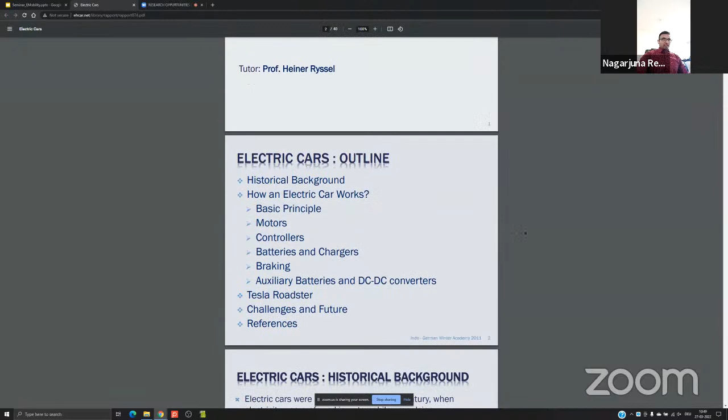Okay, so let's move to the brief history. I gave the open source links here. I didn't prepare anything on my own or anything from my company; these are open source, so everybody can refer to them later. This is prepared by, I think, an IIT student from 2011, but it doesn't matter. It has some introduction to the history of electric vehicles and electric components, so I took it for basic presentation and information.

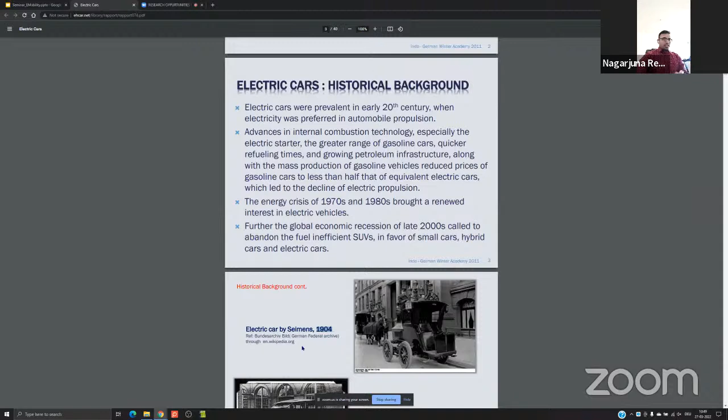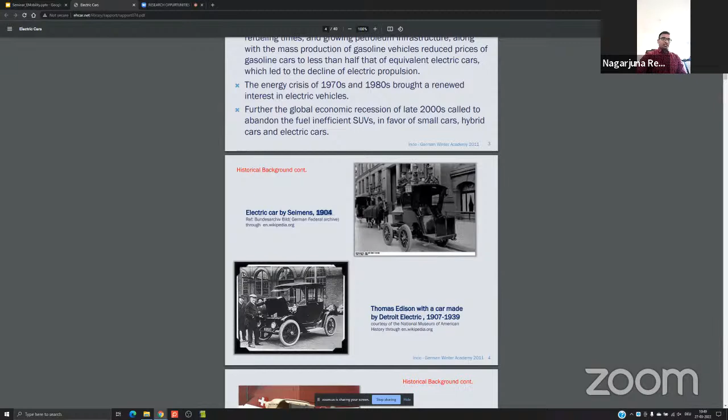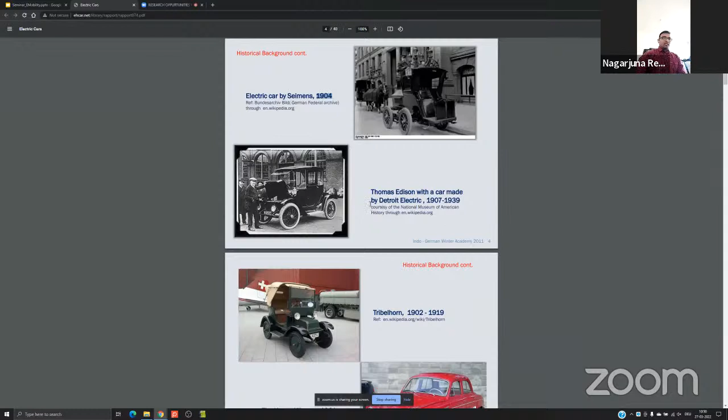Here we can see the basic background of electric vehicles, when it really started. If you look at the history of electric vehicle development, it started in 1904, close to 120 years ago now. Such historic progress we have seen over these years. It was started by Siemens as a basic electric car, and it's funny to see how the car itself looked back then. Slowly, Thomas Edison started working with Detroit Electric, and they developed a lot of electric vehicle technology in this period.

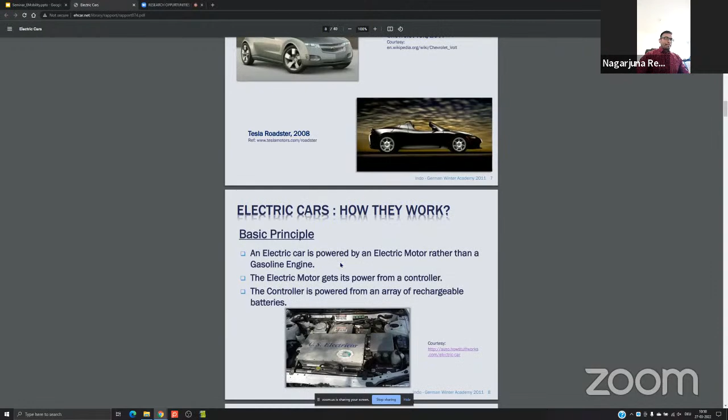Here we see how they work in principle, the very basic working principles of an electric vehicle. Any electric vehicle contains a few major components, like you see at the bottom. The PPT is not that sophisticated, but it shows the components at an overview level. We have basically a battery, called the traction battery. The traction battery is the high voltage battery.

To exemplify the terminology, anything more than 60 volts is called a high voltage battery. For most hybrid electric cars, we use a battery of more than 60 volts. And some hybrid vehicles also use 48 volts, which is also considered a traction battery. So this is just another example.

But most of the time, if it is a mild electric, a plug-in electric vehicle or a pure electric vehicle, the battery level is more than 150, 200, 250, 300 volts. Now it has been up to 600 and 800 volts of battery as well in the very modern concepts. So that's the range of traction battery level: starting from 60 volts, it can be up to 800 volts.

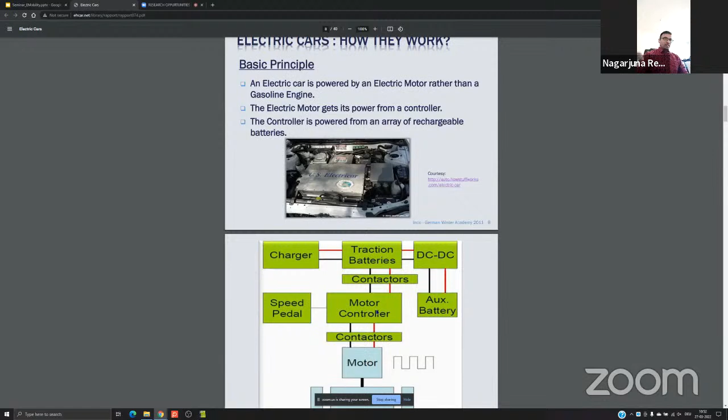And we have basically the controller. The controller is a motor controller. As we know, we need energy for the wheels, and the energy for wheels to drive a car requires a motor, and this is the motor. So I'm coming from a little bit on the reverse side now. These are the wheels, and wheels should be driven by a motor,

and the motor should be controlled by a controller. If this motor is AC, and the traction batteries are DC, as we know, we need a converter, which is nothing but an inverter. An inverter is a DC to AC converter. It converts the DC energy from traction batteries to AC energy to drive the motor. And this is done by a motor controller, which is nothing but an inverter.

And this is a major controller in the complete electric vehicle, where it is the master. It is trying to control everything with respect to torque, speed and its efficiency algorithms, ID IQ control. Whatever control we take, the controller has a microcontroller or a DSP, and this is flashed with a program which contains all the algorithms and control techniques required to control the motor.

And it has a lot of sensors and feedback signals coming in, based on which it controls the complete electric car by controlling the motor. That's to put it in a simple way. So this is the line which you see: battery, motor controller or inverter, and a motor or machine, which can also be used as a generator. We will see that later.

So these are the three major components we see in every car to really drive the vehicle, and these three components are called the traction drive system. Apart from that, we also have some auxiliary components, which are required to keep these three in operation. For example, the charger. If it is a plug-in electric vehicle or a pure electric vehicle, we need a charger to charge the traction batteries.

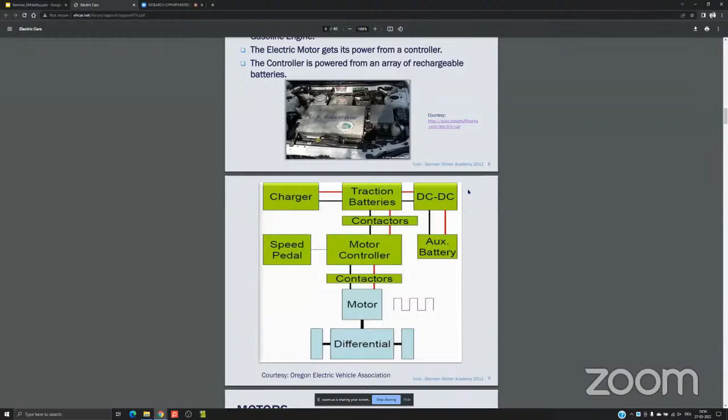From an external AC energy source, it has to charge the DC batteries. So you can already expect that this should be an AC to DC converter with proper regulation concepts. That's about the charger. We also have DC to DC. This is required because in any car, whether diesel, gasoline or electric, the 12 volt auxiliary battery is always there.

This auxiliary battery provides power supply to low voltage components like lights, the internal radio system or internal ECUs. An ECU is an electronic control unit. Each control function in a car requires an ECU. In an average, let's say BMW car, we have like 60 to 70 ECUs, from small units to bigger units. It varies across different functions.

For all those ECUs and controllers, we need an auxiliary battery apart from the traction battery, because the traction battery is high voltage and all the low voltage components, including these ECUs, work on only 12 volts. So we need a 12 volt battery, and this has been there in diesel and gasoline cars as well. Electric vehicles also have it fixed, so there is no change.

But if we want to use the auxiliary battery without any power issues, we also need to charge it. In normal conventional vehicles, this battery is 12 volts, or even 24 volts in commercial vehicles. Commercial vehicles are like trucks, lorries or buses. These bigger vehicles sometimes require an auxiliary battery of 24 volts. Either 12 or 24 volts, it needs to be charged.

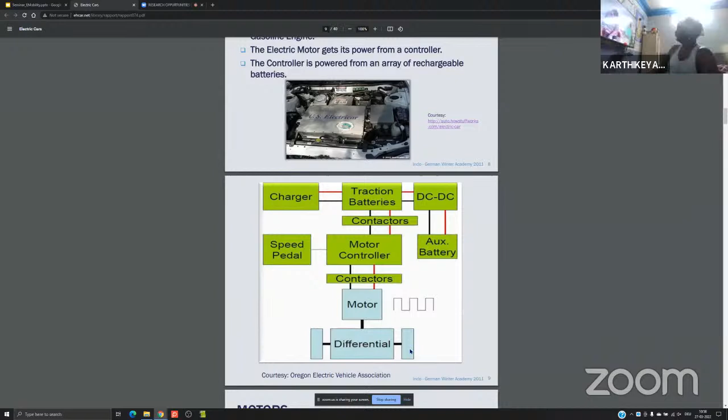Okay, thank you. So these are the basic components of an electric vehicle. Wherever you see, these are most common, and the functionality is also most common. What differs is the internal control systems. So the controllers, if you see here, we have only the motor controller, the DC-DC controller, and the charger also has some controller to have effective charging.

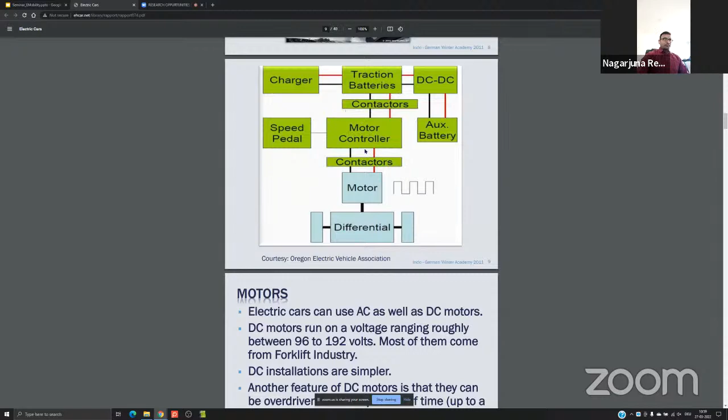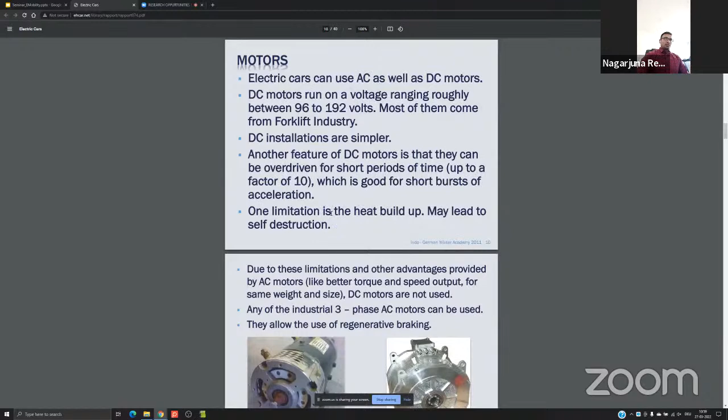So these three controllers have different algorithms to have different ways of controlling and different ways of managing their own systems. Yeah. And there is some information on which kinds of motors and which voltage levels have been used, but I don't go into it. You can also refer to it later from the presentation and link.

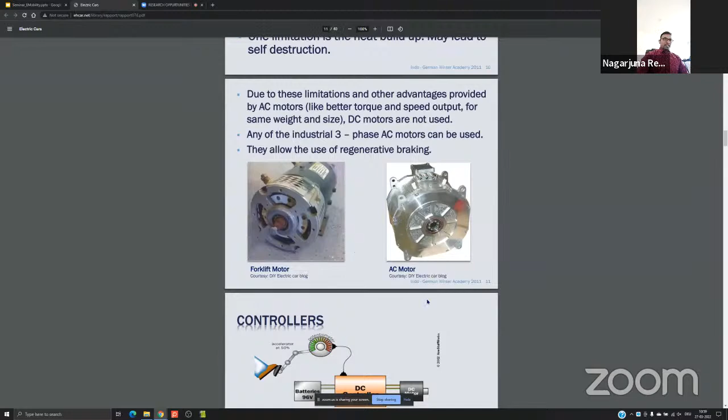And these are some examples of how the motors looked in the very beginning days. So forklift motor, AC motor, three-phase, how they have been used. And some example of how a DC-DC is working. So with a DC here and DC motor. So we don't use.

Can you please mute? Hello.

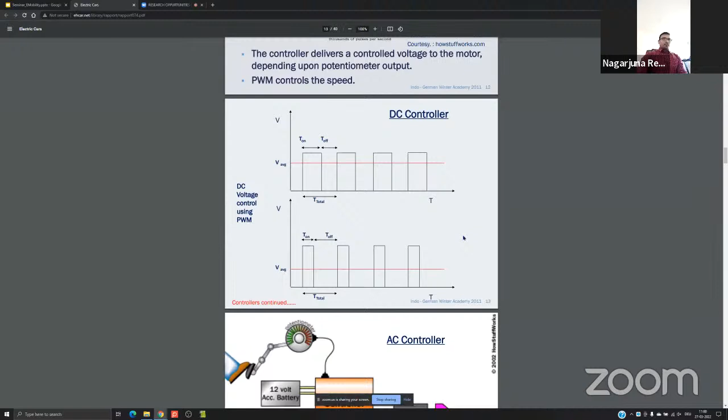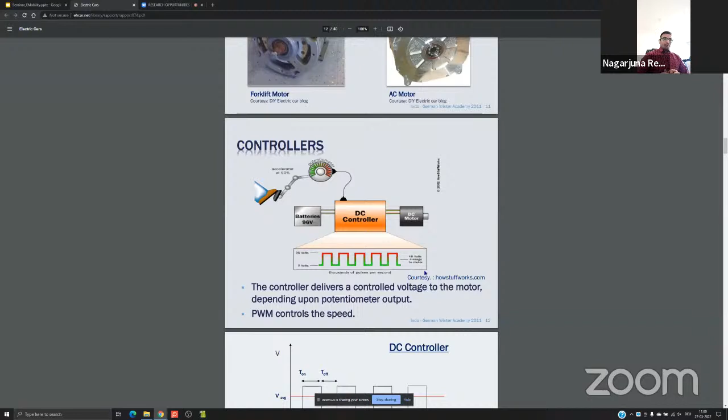Yeah. Okay. Thank you. So we have several types of motors, basically DC motors and AC motors. And there are several advantages of AC motors, of course, because of their effective power efficiency and also simple design and simple controlling possibilities. We go for AC motors, and we use three-phase AC motors. It's much more effective, much more powerful. So we don't really see DC motors, and we always use AC motors.

And you see here the same thing again, as we discussed, with several components put together. So a traction battery, which is 300 volts here as an example, and a controller to control the AC motor, so that the AC motor can give an output of mechanical energy, which goes to the transmission, which also includes the drivetrain and wheels of the electric vehicle, a normal car.

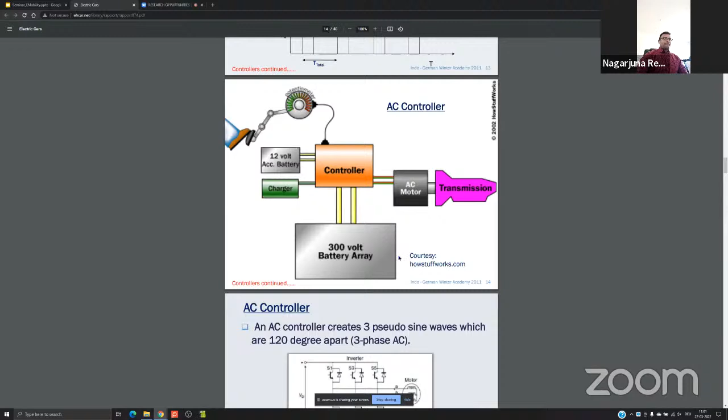And a charger here to charge the 300 volts battery. And the controller also includes a DC-DC controller in general to also power up the 12 volts battery. Yeah. And here is a simplified view of how an AC controller looks. What is meant here by AC controller is a DC to AC converter.

So as we have already seen, we have been using 3-phase AC motors on most of the cars, and the 3-phase AC motors require an inverter which can convert the DC energy into AC, for which we need silicon-based switches. It can be MOSFETs, IGBTs, or SiC, silicon carbide, which is the latest technology. Here we can see an example with an IGBT, an insulated gate bipolar transistor.

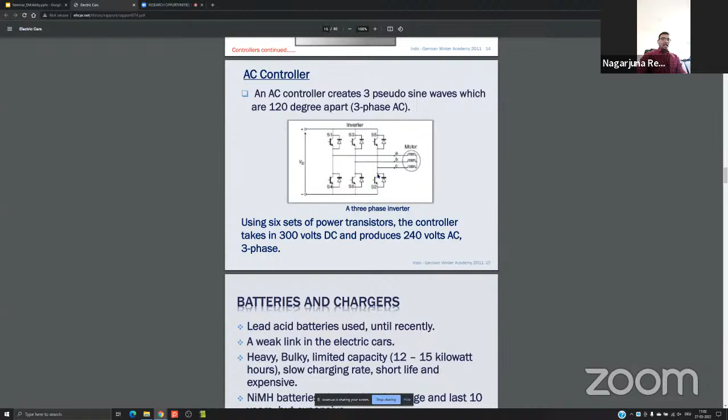So with these IGBTs, if it is 3-phase, we need to use at least 6. You can see here S1 to S6. So these are 6 IGBTs placed in a way to transfer DC to AC. I may not go deep into how the DC to AC inverter works. It is a simple conversion of DC into AC with specific switching cycles.

So we have a controller, and you can see here for each IGBT a gate, which is the major source to turn it on or off. So a gate pulse is used from a controller. This controller output can be given to these IGBTs so that they can be switched on and off with a particular logic to transfer the energy from DC to AC.

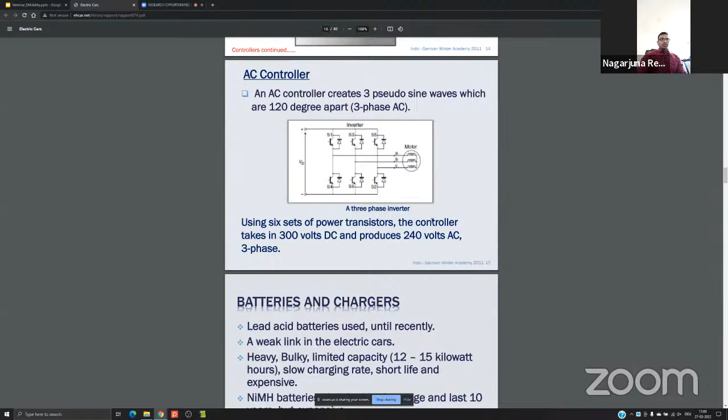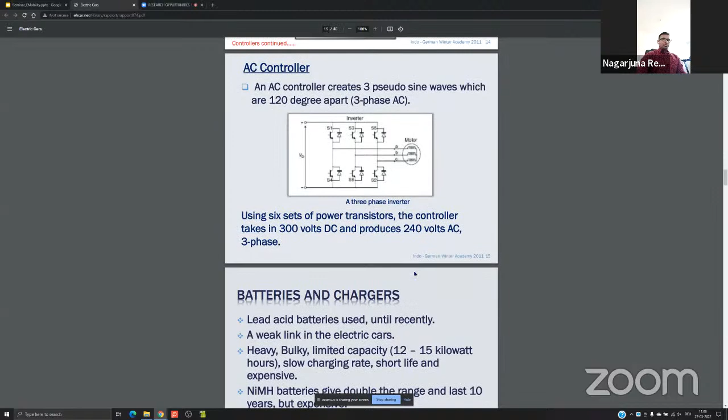And there could be several types of such control aspects. It could be a simple inverter, it could be multi-level inverters. It could also be different types of algorithms to switch in a specific way. Yeah, there have been several patents and algorithms designed to effectively switch this inverter so that the efficiency of the complete system is improved. So controlling these switches has a great influence.

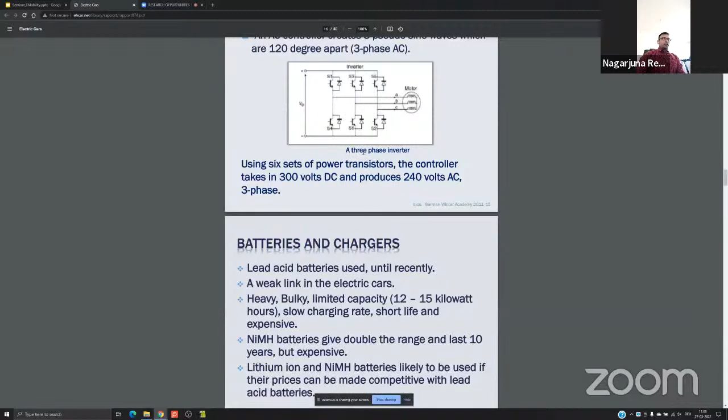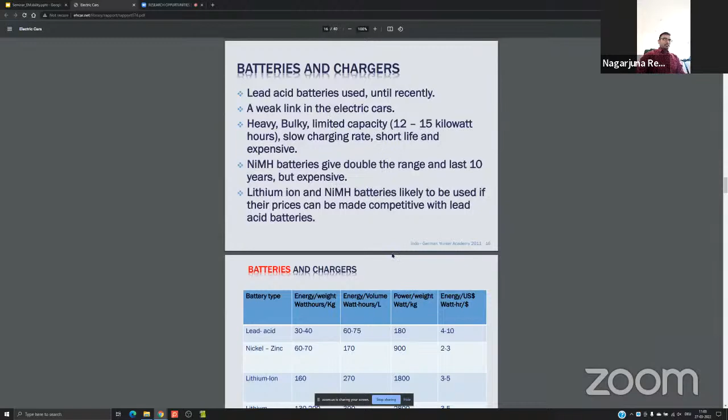Yeah, so this is a simple inverter, how it looks like. And also some information on batteries and chargers here. Like we have several types of batteries: lead acid, nickel zinc, lithium ion, lithium polymer, and most of the vehicles at the moment are using lithium ion or lithium polymer because of their possibility of energy efficiency.

So in a small compact unit, they can have more energy stored so that it can give longer ranges for the vehicles. So the more energy you have in the battery, ampere hours, the more distance you can travel with the energy that you have. It's really proportional. So the distance is also given by the energy storage possibility.

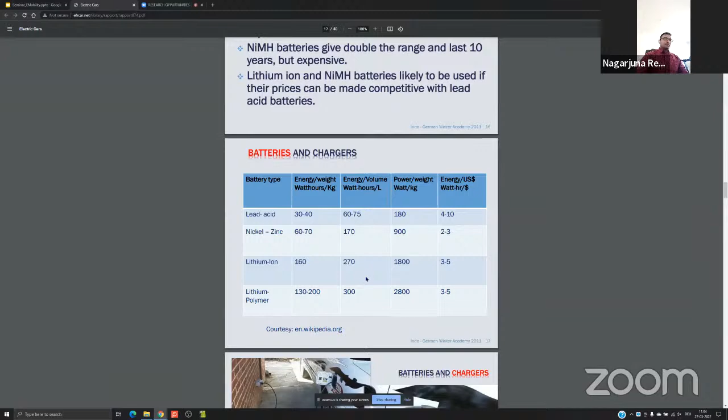So that's the reason why, if you see here already, lithium ion and lithium polymer have the possibility to really store a lot of energy in a small space. So the density of power and the compactness of power storage is higher here. So at the end this is also highly energy efficient, and performance is also very good with these kinds of batteries.

So here it looks like it's a very old image, but for the newer cars, if you go into Google and type how the chargers look for different cars, you can always see. So this is a charging port for a vehicle, for example, and you just plug in from the wall socket, which in India is single phase 230 volts. We can just input it to the charging socket here.

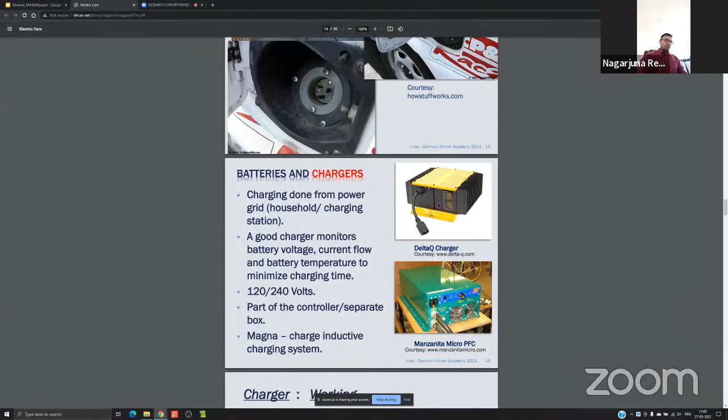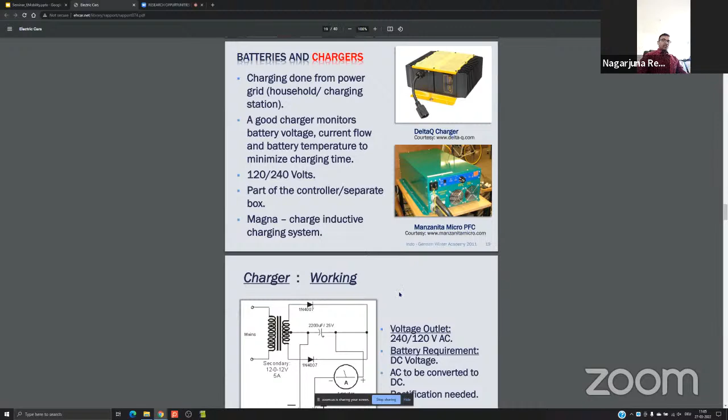And then internally it has a controller which monitors the fluctuations of the input AC and converts it into DC at the output of this controller, and it can charge the high voltage battery. Yeah, these are very basic pictures of chargers, but the real ones look a little bit different. They're very big with current technologies to support a really high range of voltage, a higher range of ampere hours and higher mileage. So it can really go far.

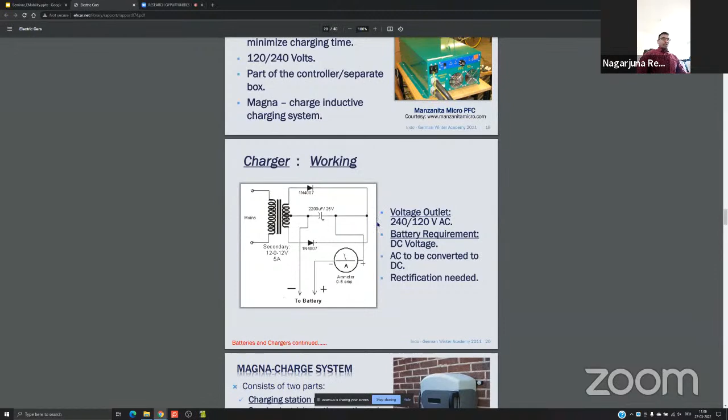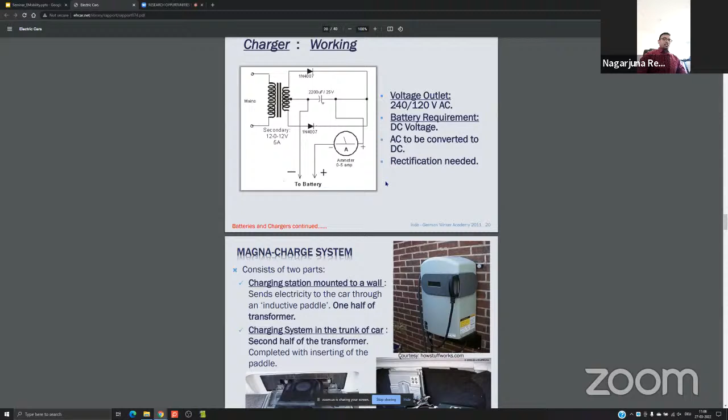So, simple charger principle. A charger is basically AC to DC, because it has to charge from an AC outlet, a wall socket, which is the house supply, and convert to DC so that it can charge the batteries. So it is basically the rectification principle, and this is a simple diagram, but the AC to DC controllers really used in cars look a little bit different. They have other sophisticated elements as well.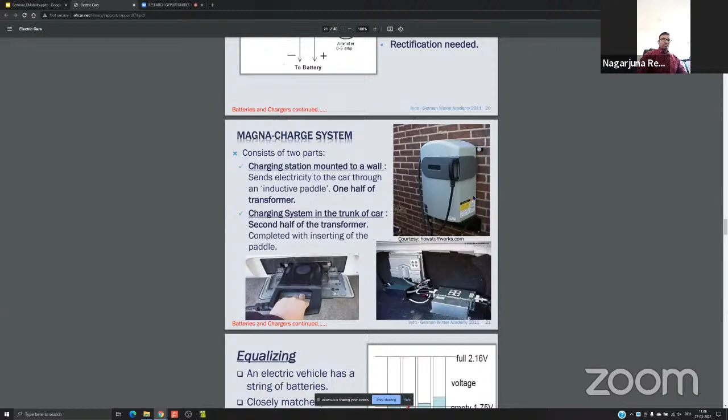So one example is given here, the Magna charge system, how it is placed onto the wall, how it is built and so on. Small example here. And batteries always come with certain problems, which also have to be solved using some algorithms. That's why, when it is an AC to DC converter charging the batteries, it always has to check several factors. One of the most important factors is equalizing.

A battery is not built with one single cell. It is very complicated to build such a big battery chemically. So what many companies do is build modular batteries. Modular batteries means we have several small compact cells put together in a series parallel combination to achieve the required voltage range and required ampere hour range.

Yeah, even if you look at any toy or any small battery-powered equipment in your house, it doesn't really work with one single battery. If there is a really high voltage and high current requirement, you have multiple parallel cells. You install them, and based on the voltage and current requirements, they are circuited in a series parallel combination. Then it achieves the required power level.

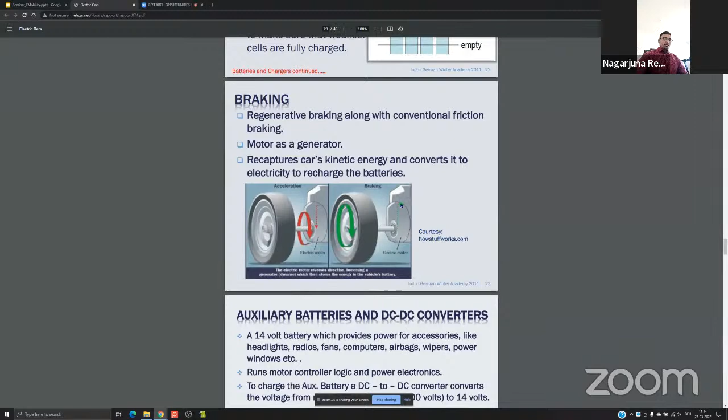On auxiliary batteries, as I said, these are nothing but 12 volt or 24 volt systems. Here it's written as 14 volts, doesn't matter, it's between 12 and 14. If it's a commercial vehicle we use 24 volts, and if it's a normal car we use 12 volts. This is used to power accessories like headlights, radios, fans, computers or ECUs, airbags, wipers, power windows, etc. There are many low voltage components inside an electric car which can be powered using this 12 volt battery.

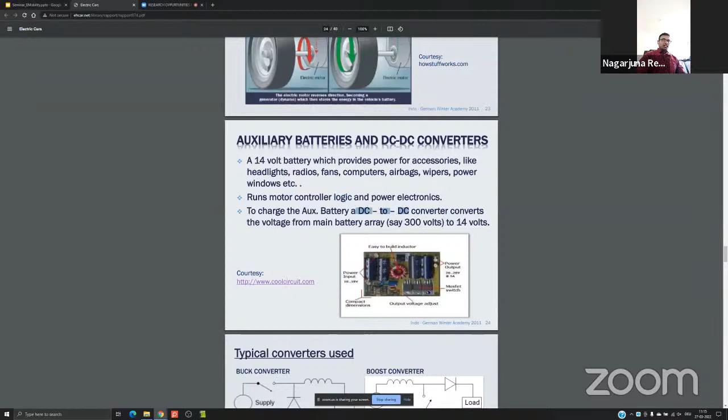This is also used for the motor controller logic and power electronics, meaning the logic controller is the ECU, electronic control unit. For this we need a DC to DC converter, which we've already seen. An example of how a board looks is given here. Typical converters are buck-boost, which can sometimes also be used.

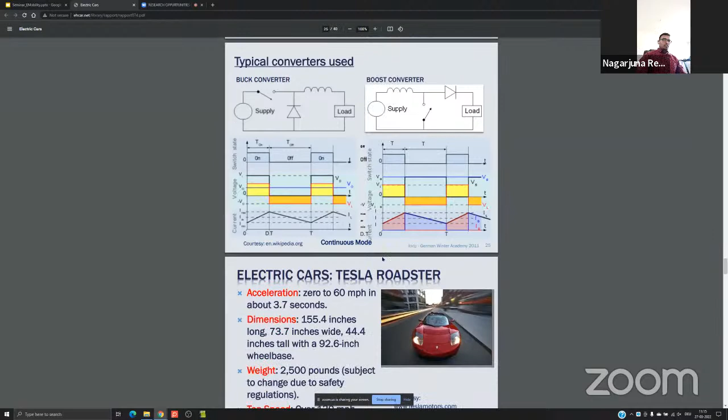Some examples of vehicles, like the Tesla Roadster model here. What are the brief features of it? The acceleration possibility to go from 0 to 60 miles per hour in just 3.7 seconds, which is quite fast. In normal diesel or gasoline vehicles, we need more time to come out of the inertia of the engine to reach this level of speed, taking a few more seconds. So comparatively, the battery powered or electric vehicle has a higher speed acceleration possibility.

And its dimensions, just as an example. These are just the features, so not really important for the technical aspects at the moment. You can also see the battery life, how much battery life can be expected.

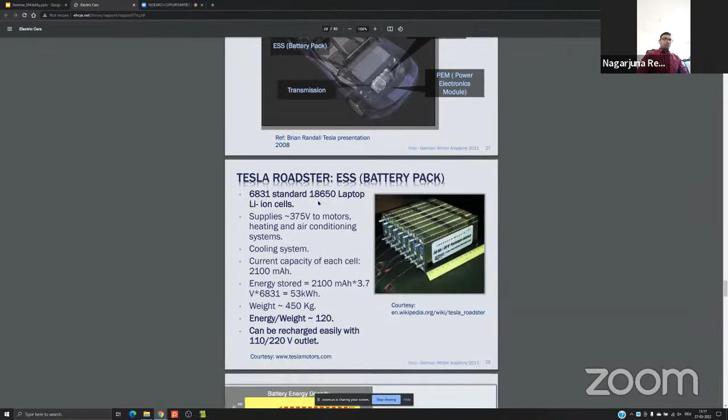This is what our battery pack looks like, just an example here, but the most important thing to know is it is not one battery, it is a combination of battery cells. We can combine them in series and parallel to achieve, let's say, 375 volts. We use small cells in series to achieve this voltage, and to achieve the milliampere-hour or ampere-hour rating, we need to keep them in parallel to achieve the rating of the complete battery pack.

Sir, one small doubt, sir, I think some people are chatting in the chat box. Some queries have come, sir. Okay, I didn't see that. Can you see the chat box, sir? At the moment, or shall I check on my mobile. Yeah, I'm able to see it on my mobile. Just a minute, I'll keep the presentation active.

Battery array size, series parallel combination... what are the parameters... I'm not sure if I can justify this 100% about batteries, but I'll try to answer.

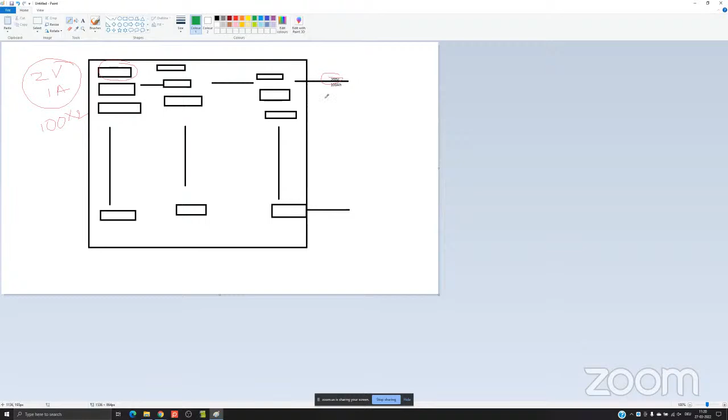And similarly, if you want to achieve 100 ampere hour, let's say my one cell is 1 ampere. To make it 100 ampere, we need 100 legs, because in series the current is same. So we need to have 1, 2, and so on, 100 legs.

If you have 100 legs connected in parallel, in the parallel circuit the current will be added up. So 1 ampere, 2 ampere, and so on, up to 100 ampere.

So if you want to achieve the voltage range, it is a series combination of cells. And if you want to achieve the current range, you need to make it in series in each leg, in parallel. So in each leg, to support this 200 volts and 1 ampere, at the end of an output of the circuit you always can get 200 volts, 100 ampere hour. Which means per hour, for 1 hour, if you are really using it for 100 amperes.

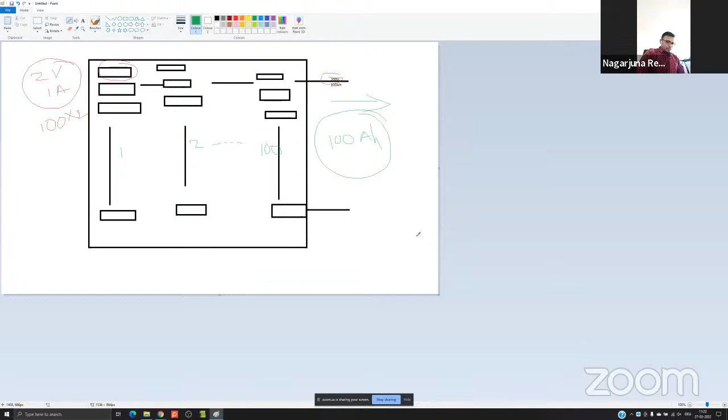Yeah, audible? Sir, actually you are saying about the series parallel combination based upon the voltage and current rating of the battery. My question is, suppose we are arranging various batteries in terms of the capacities, that is the voltage and current rating. My question is, if any one particular cell or battery, or all the batteries, are to be uniformly charging and discharging in the same category. Suppose if any one battery's life is to be somewhat degraded compared to other batteries, very near to the neighbor battery or very near to the next cell, next array, should the battery degradation be uniform or different, sir?

It is different. So the battery degradation also depends on each cell's characteristics. So it's a good question. Actually, if you really think about each cell as a battery, each cell has a different chemical composition.

Even though it is meant for, let's say, 2 volts, 1 ampere as I said for one cell as an example, during the life cycle this cell can last, let's say, for 10 years, just for example. And another cell can last only for 9.5 years. And another cell maybe only 9.7 years or something. So each cell has its own special chemical composition, even though they are meant for the same rating and the same purpose at the end. Each one is slightly different.

And the chemical composition between the anode and cathode in the cell also has certain characteristics. So that's the reason why, at the end of this 10 years or 9 years period, because of its internal chemical stability, it can either give longer viability to us, or it can burst off a little earlier. So it is different for each cell, and the same thing goes for each leg as well.

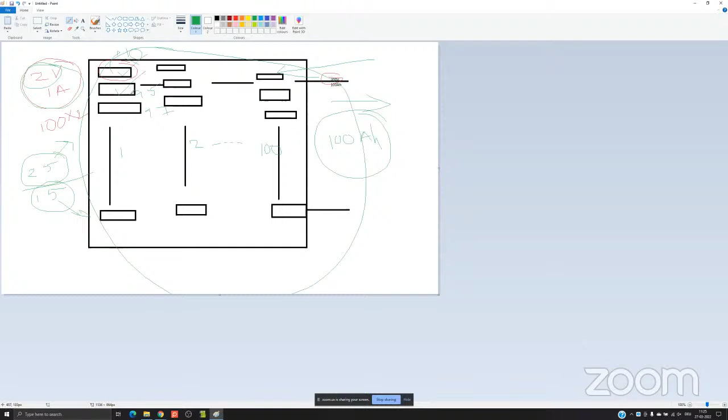So if it is a 2 volt cell, for example, it is normally capable of between 2.5 as an upper level and maybe 1.5 as a lower level. So it cannot overcharge more than this, it cannot undercharge less than this, and this will impact its life cycle. If you are making a good cell balancing technology, ensuring each cell and leg is taken care of to not overcharge or undercharge, these properties last for a long time. But because of spikes, improper design of internal electric components, or improper design of algorithms, if it overshoots to 2.7 very often, this cell is prone to get damaged very fast. But this doesn't influence the other batteries - if this cell alone has a problem and all others are healthy, those healthy batteries don't get influenced by it.

Understood? Okay, thank you sir, thank you sir.

Okay sir, yeah, so cell balancing is a bit of a different concept, we need to go deeper to see about it. But generally, battery characteristics have an upper level and lower level for overcharging and undercharging. If the cell balancing technology is really good, the life cycle and lifetime of the complete battery pack would be better. If there are more cells damaged in one leg, it tries to take more energy from the other packs to give the required energy. Maybe there is a controller saying, I have one complete leg damaged or a few cells damaged, because of which I have to stop the complete leg so that the vehicle can still operate.

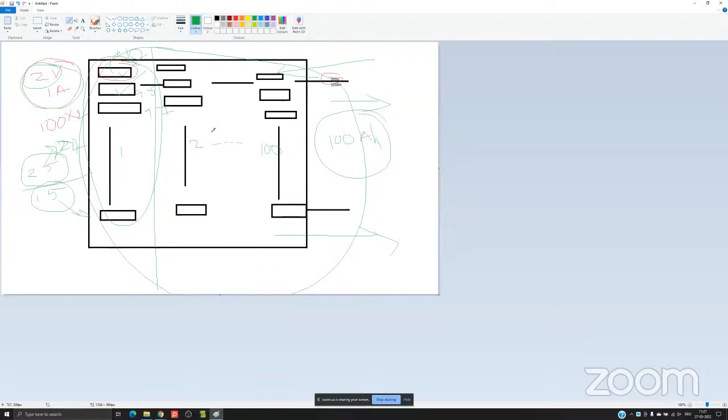Yeah, I hope it's clear to a certain extent. If it is not, you can let me know.

So that's about the series parallel combination question. And regarding charging stations, I am not sure how good they are in India, but I'm sure there are definitely charging stations in India, though very minimal, can be counted on fingers I think. I'm not really following the news on how it is in India. Maybe we can Google it to see how many charging stations are in India. But of course it has to increase in the coming days if the electric vehicle market has to really go into people and into the passenger car system. Yeah, it has to increase.

And I know it's also very slow because it's not easy to accept high price electric vehicles on the road, and not many are really coming forward to buy it. As we know how the market goes in India, that's the reason I think it might be slow in establishing this infrastructure of charging stations, which is also one of the major blocking points across the world.

In any country we take, the infrastructure to keep more charging stations, and also the time taken for charging - quick charging, fast charging, many are coming up, but still it is not meeting the satisfaction of the consumer. If I have to fill diesel or gasoline, it might take just 5 minutes to fill in at any of the in-between stations and drive ahead. But to charge an electric vehicle, I have to wait for at least 2 hours, 3 hours, sometimes 4 hours to completely charge the battery and then drive from there. So it has these current blocking points in terms of infrastructure.

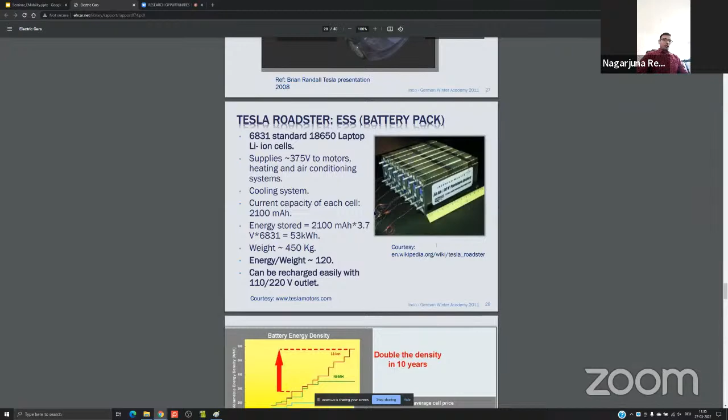So to continue, coming back to the battery pack, we have seen how the several cells are in series-parallel combination and how they have been used. And I think here it is.

So not only the parameters, like one of the colleagues asked just now, there are derived parameters from the existing energy calculations, like from voltage, current, and impedance. We also can calculate certain energy over a period of time. And there are also internal formulas that can run to really see how the energy density is accumulated and how each cell is really being effectively used. So there are several possibilities.

For example, here they have battery energy density to compare between several types of batteries: lithium ion, nickel metal hydride, and so on. Based on this, they have also observed the cell price over a period of time. Battery cell price is declining slowly because of improving technology and cheaper overall manufacturing costs, but it is still the most expensive one.

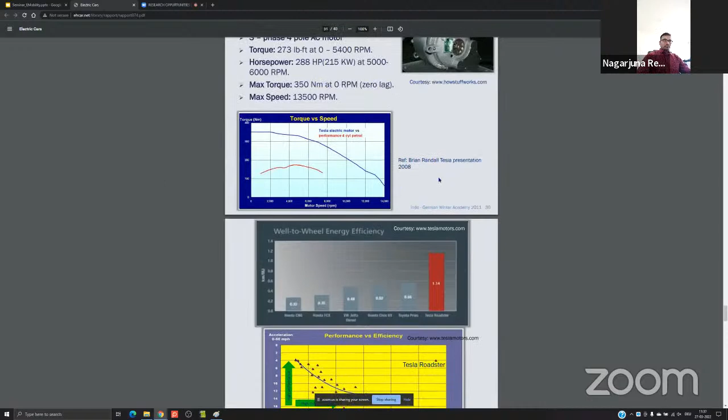Similar to the battery, which has voltage and current profile observation, we also have torque-speed profiles for the motor, which are also very important to observe how the torque-speed characteristics work for a vehicle, for a motor. Here we have some energy curves, which you can also see later: performance versus efficiency, or acceleration versus performance.

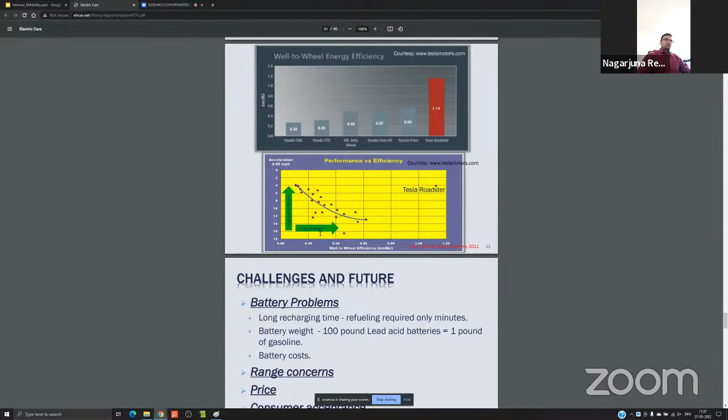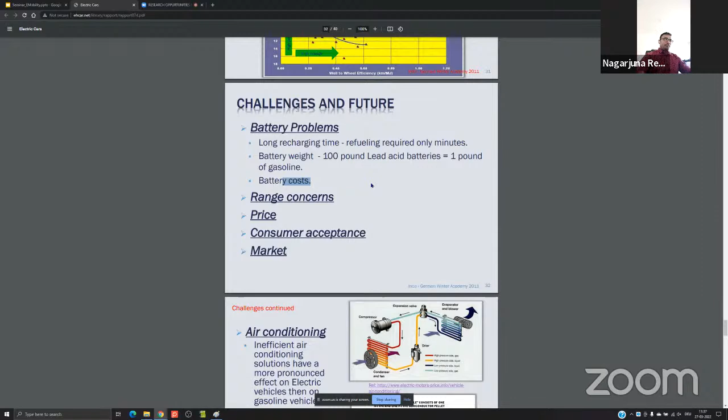Okay. So what are the challenges in general? Long charging times, as we just discussed. The battery requires a really long charging time compared to refueling times, so that's one of the most problematic things with respect to infrastructure. Battery weight is also very high, and it is also very expensive. And there isn't proper infrastructure with many charging stations or frequent charging possibilities during a road journey, which is also a concern right now.

So range concerns. If we use a battery of 400 volts and maybe 100 ampere hours, for example, and it gives a range of 200 kilometers, people have to charge every 150 to 200 kilometers to go further. If the journey is 400 or 500 kilometers, they cannot travel with one charge. With one charge they can only travel up to 200 kilometers, for example. That is called range.

This range has been improved in recent years, especially by Tesla. It is a pioneer, making benchmarks in every aspect, and in range it is trying to give up to 700, 800 kilometers. It is in plan, I think, which is a really great advantage of using electric cars. With one charge you can really drive that long. But it's also expensive. The range is directly proportional to the battery, and the battery is directly proportional to the price, so it's more expensive again.

That's why price is one of the concerns, and consumer acceptance, because of the infrastructure issues of charging stations and the pricing. The consumer is not able to accept buying it immediately. But because of regulations imposed by governments, subsidies, and renewable energy sources in development, consumers are accepting it more and more. In the coming years people will use more hybrid and electric vehicles on the roads. And the market is based on consumer acceptance: if consumers accept hybrid electric vehicles, the market share also increases.

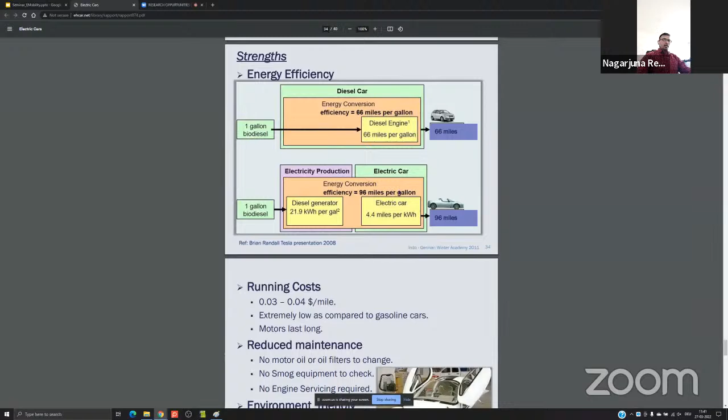So how is the energy efficiency at the moment if we compare electric cars and diesel cars? They have given it in miles per gallon, so the electric energy is converted into a diesel parameter to make the comparison easier. We already see there is a lot of difference. We will also have a quick look at the efficiency later in our presentation.

And yeah, running costs can be reduced if it is an electric car, and maintenance is reduced, and of course it's environment friendly with zero emissions. And if you really come across any electric vehicle which is driving beside you, you can almost hear no sound. It just starts off very smooth and low noise, that you can also see.

And these are the advantages and future developments. So this is from 2011. So in the last 10 years, we have a lot of developments, but the development areas are still the same because they still have to be developed with advanced technologies so that the cost efficiency can be improved. So batteries are always the first priority to improve their technology so that they can come for a cheaper price, with better pack performance and energy density. And these are the challenges in battery technology at the moment.

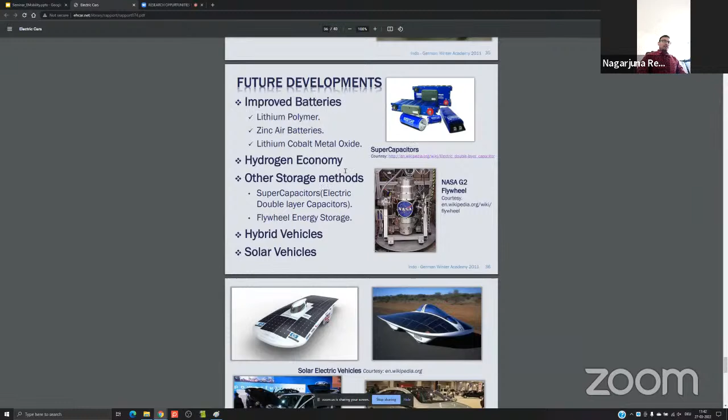And there are also parallel technologies emerging with fuel cells. I think fuel cells are one of the alternatives to use instead of batteries, but still not the most stable ones. That's why it is still not in the market. Yeah, and solar panels are also okay, but not so effective because the output power is not really suitable for passenger cars to drive to satisfactory levels.

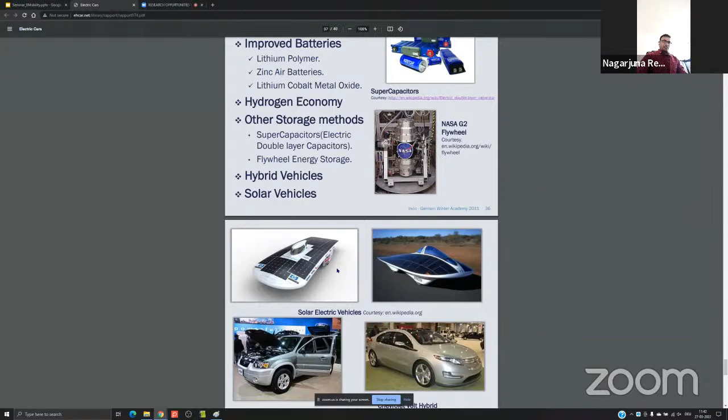Yeah, so these are some of the example models, how they look, from Chevrolet and Ford with the hybrid models. So these are some of the references, you can look into them later. So we have seen what electric hybrid vehicles are, what the major components are, how they work, and what their implications are to some extent. We have not gone very deep into each of the elements or algorithms, but we have seen on a basic, overview level what it contains and how they work.

Can you please mute?

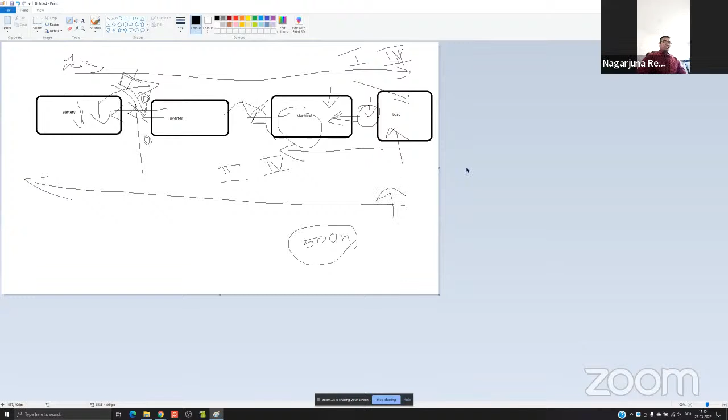Okay, sir. Fine, sir. Thank you, sir. No problem. If it is still not clear, after the video we will come to this point again. Definitely, sir. Okay.

So these are the basic directions of the 4 quadrants and 4-quadrant operation of an electric car. Then we come to the same point which one of our colleagues asked. This is an interesting concept and also sometimes difficult to understand.

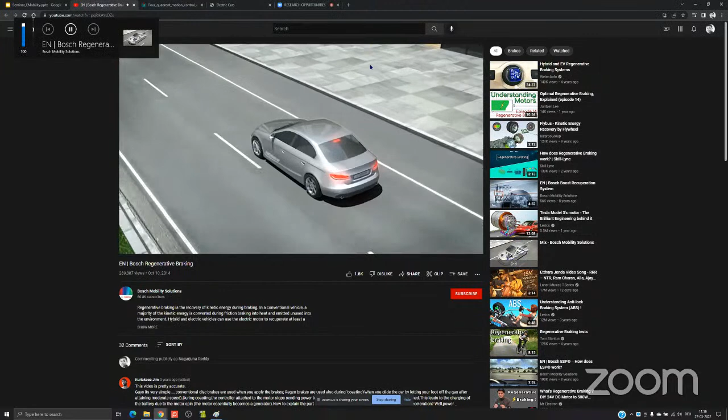Let me check if the audio is available for you. Let me know, sir, if the audio is audible. Is it audible? No? Not audible, sir. Video came, but not audible. Was it audible now? It is not audible. Okay, I will try to play once again. Please let me know if it is audible. Audible, sir. Okay, let me play it from the beginning. And also visible, right?

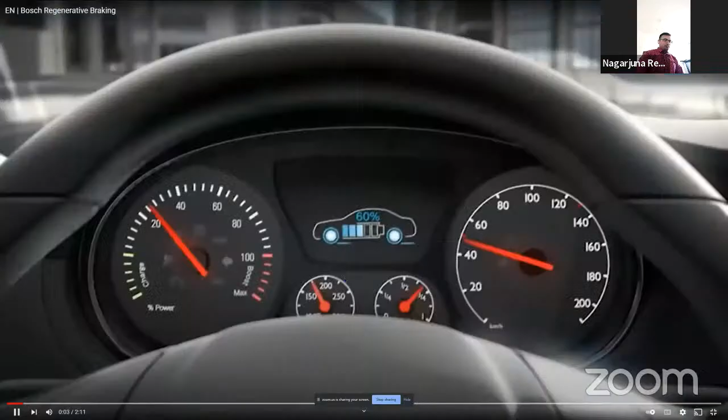Regenerative braking is the recovery of kinetic energy during braking. In a conventional vehicle, a majority of the kinetic energy is converted during friction braking into heat and emitted.

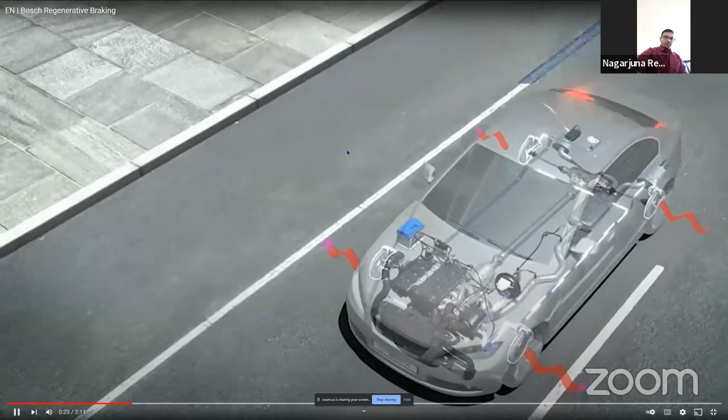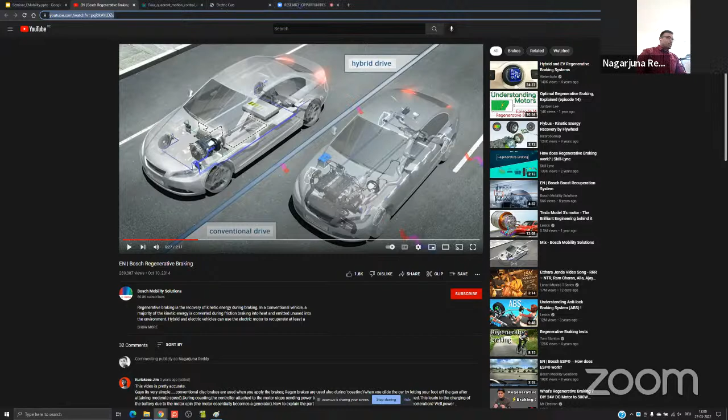Sir, some echo came. Seems some problems. I think since I have connected on two systems, it is showing some trouble. Let me do one thing. Am I still audible? Not audible, sir. Am I audible now, my voice? Yes, your voice is audible, sir. Is the website available in that link? Yes, it's available. If possible, shall I open it, run it here and share the screen? Sure, sir, I can share the link right away. That would be a good option. Please share and play it, sir.

Is it okay, sir? I couldn't hear anything. But yeah, one minute, please run. One minute. Yeah.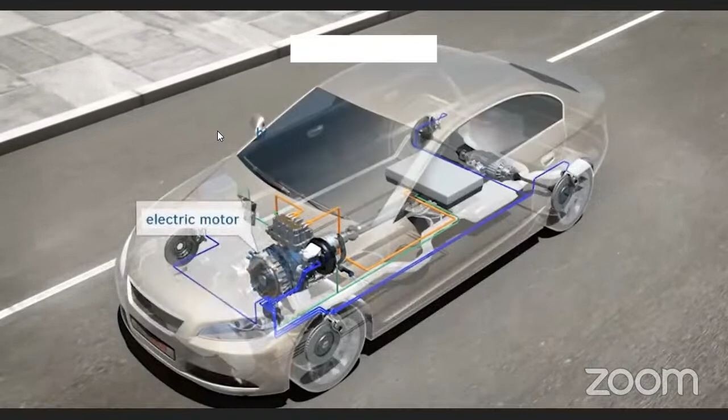The driver steps on the brake, the vehicle's electric motor switches to generator mode. The wheels transfer the kinetic energy via the drivetrain to the generator. Through its rotation, the generator converts a portion of the kinetic energy into electrical energy. This energy is stored in a high voltage battery. The generative braking torque of the electric motor, which is the result of energy generation, decelerates the vehicle.

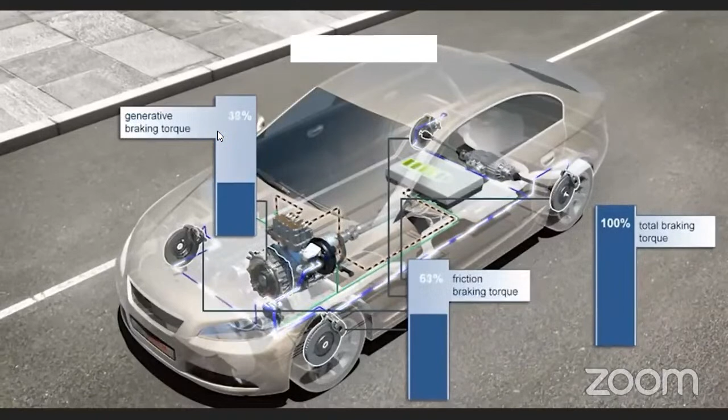At low speeds, for example, shortly before the vehicle comes to a stop, the electric motor can no longer supply sufficient generative braking torque, and the friction brake must be activated. To maintain the required deceleration, the braking torque from the friction brake is continuously adapted to the current generative braking torque, a process called torque blending.

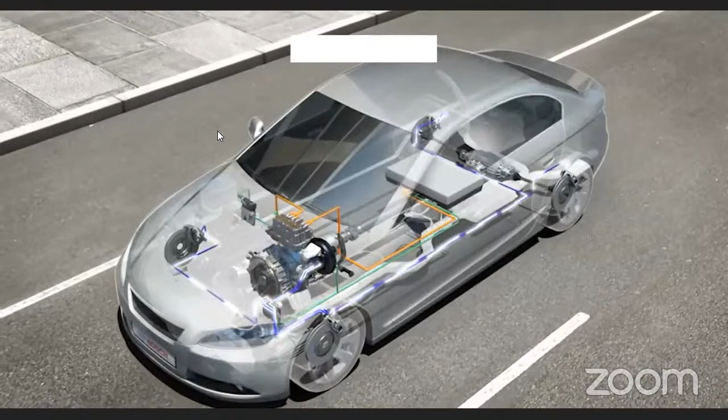In the case of full braking or an unstable driving condition, the vehicle is usually decelerated solely via the friction brake, as wheel-specific interventions are required. Regenerative braking enables an extended range in electric vehicles, as well as lowering fuel consumption and improving CO2 balance in hybrid vehicles. Invented for life.

Yeah, can you play it once again, sir? Okay.

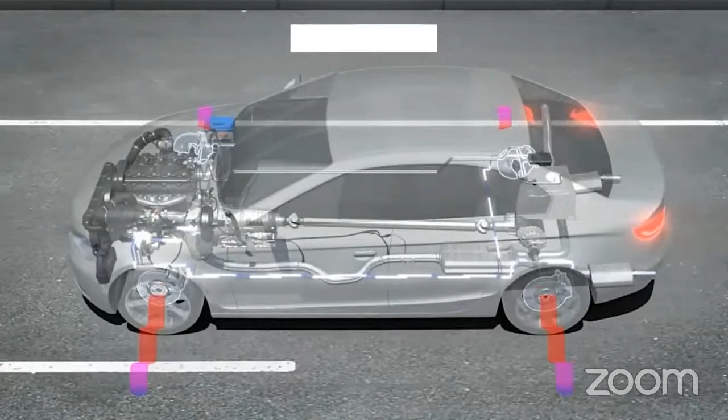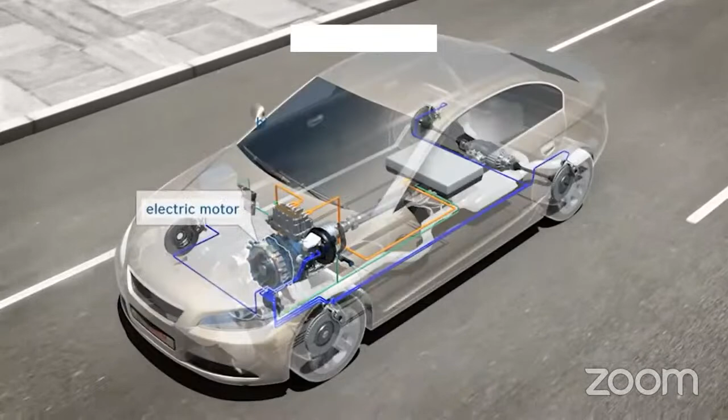Regenerative braking is the recovery of kinetic energy during braking. In a conventional vehicle, a majority of the kinetic energy is converted during friction braking into heat and emitted unused into the environment. Hybrid and electric vehicles can use the electric motor to recuperate at least a portion of the kinetic energy for reuse. When the driver steps on the brake, the vehicle's electric motor switches to generator mode. Wheels transfer the kinetic energy via the drivetrain to the generator. Through its rotation, the generator converts a portion of the kinetic energy into electrical energy. This energy is stored in a high voltage battery.

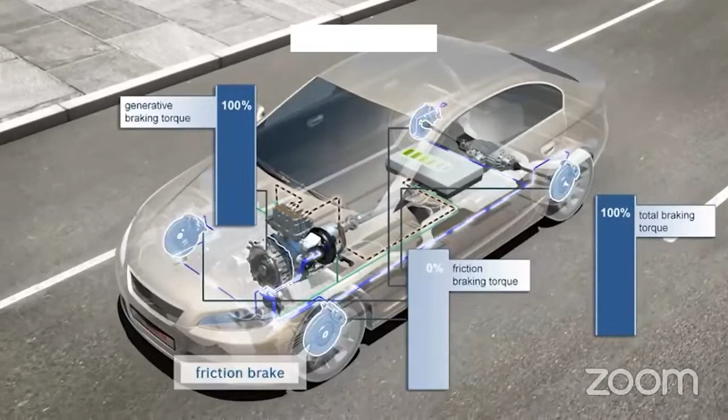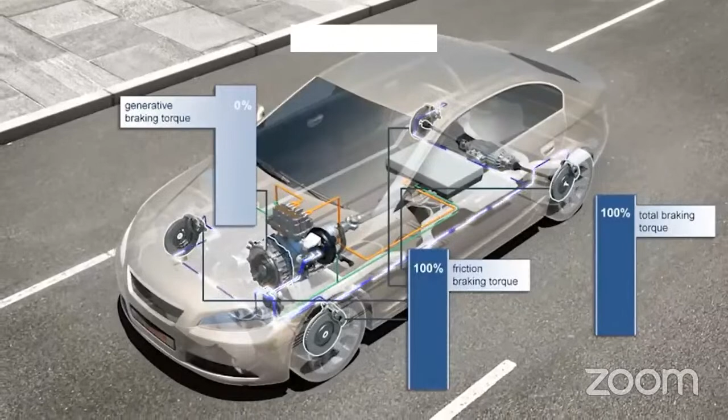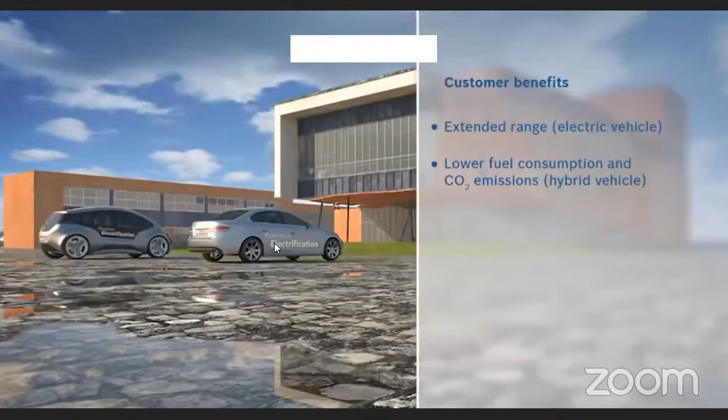Okay. Yeah, thank you, sir. Yes, I stopped the sharing. Yeah, I will share again. Yeah, there were some echoes and disturbances in between, so I asked for playing it a second time so that people can hear it clearly.

Yes, sir. It's actually interesting if you have really heard the complete information in this video. There was one term used at the end, very, very important: torque blending. This is the phenomenon and concept required in EVs for regenerative braking. Torque blending is a concept to share the reverse energy, or the negative power available, distributing it between the brakes and what a motor can do.

So the machine itself is acting as a brake during the braking process, and because of that it is trying to generate electricity and use this electricity to charge the batteries. So this is from the motor side. On the other side, if you're pressing the brakes too hard, it also has to balance it to stop the vehicle as per the consumer's or driver's expectations. So it also has to use some of the braking energy to go into friction and stop the vehicle.

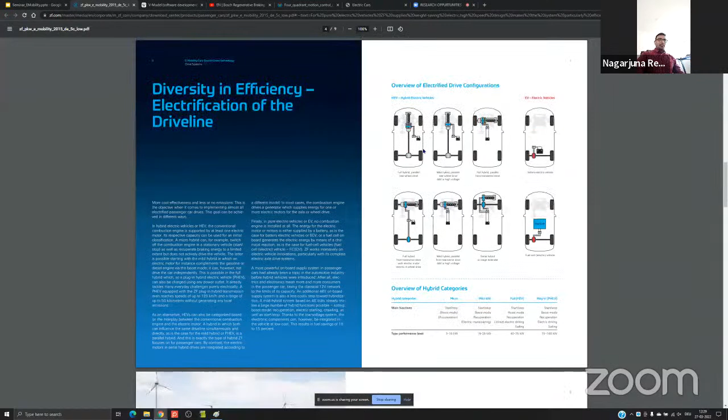There is also a link provided here with the e-mobility concepts from ZF, where you can see more detailed information on different types of electric drive configurations, motors used, inverters used, and their specifications. This is an open source document, so I have given a link. It would be really interesting, please go through it later.